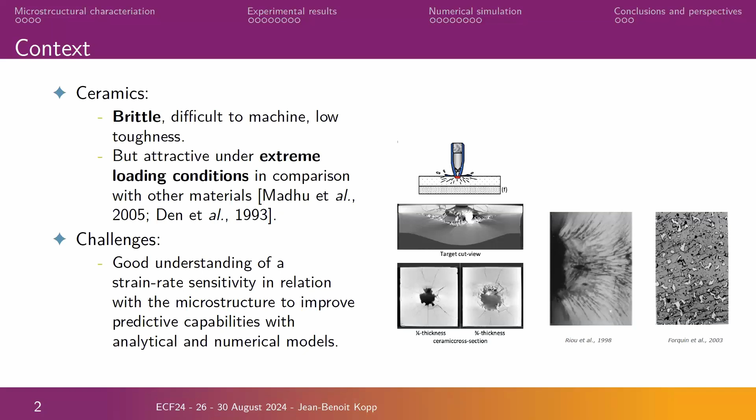Ceramics are well known to be very brittle and difficult to machine, with very low toughness, but they are quite attractive materials for specific applications, especially for defense and space, because under extreme and dynamic loading, compared to other materials, they show very good properties, even with this kind of fragmentation mechanism. So the challenge for this material is still to understand the strain rate sensitivity in relation with the microstructure, to improve predictive capabilities with different models.

We explain this increase because of the link between heterogeneities, the microstructure, and the dynamic effects of damage under dynamic loading. But finally, it's quite complicated, especially for brittle ceramics, to try to describe experimentally the evolution of the microstructure under dynamic regime.

So that is probably a crazy challenge, but we work on that, trying to describe the evolution of the microstructure at very small spatial and temporal scales during dynamic loading, to try to explain and corroborate the numerical model proposed by Cohen in 2014, or more recently in the lab by Vincent Lochon.

So the methodology is, first of all, to try to control the microstructure of porous alumina. We will talk about that just after, with the manufacturing process of the material. We use a specific specimen geometry, which is a modified Brazilian test. I will talk about that later, because we know this kind of specimen geometry well in the lab.

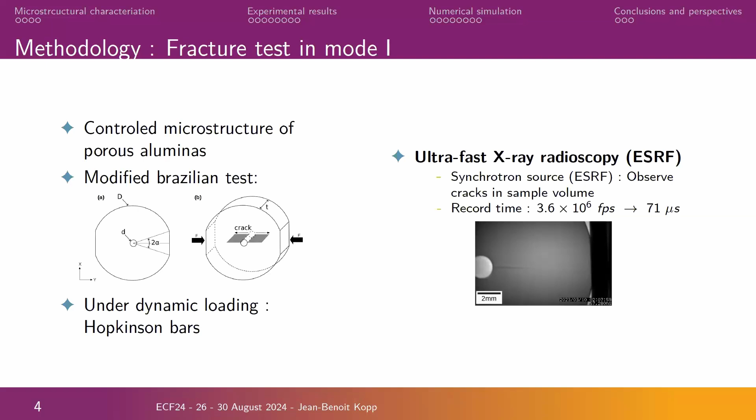This geometry makes it possible to apply dynamic loading with a split Hopkinson bar. And finally, we were lucky to use ultra-fast X-ray radioscopy at the ESRF, and it was possible to follow the fragmentation with information about the microstructure, even though it's only radioscopy in dynamic regime, because tomography is not possible with this kind of fracture time, but radioscopy was possible.

About the microstructure and manufacturing process, we use a gel casting process with an industrial collaborator, which made it possible to manufacture very complex geometries. First of all, we have a preparation with ceramic powder and polymers to achieve a specific microstructure.

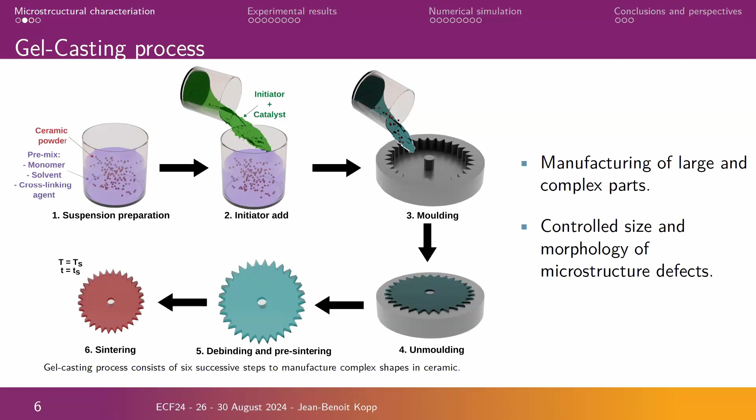In our case, we wanted to control the size and morphology of the microstructural defects, which in our case was porosity. So after molding and sintering, it was possible to have dense ceramics with a specific mechanical behavior.

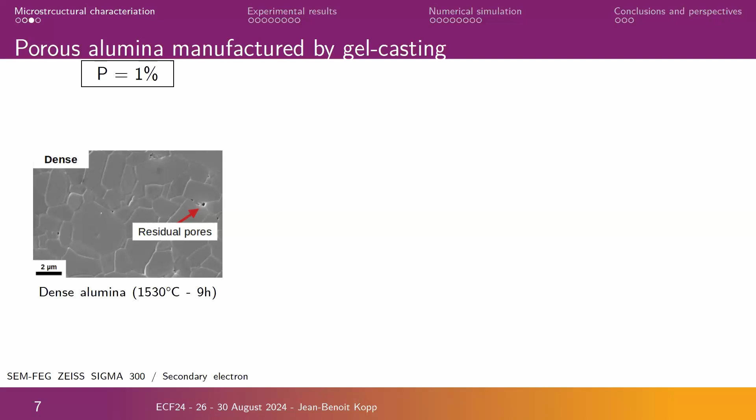So the choices we made about the material: first of all, we focused on dense alumina because it's a cheaper ceramic, and we have a lot of information in the literature for this kind of material. So we have a dense alumina with a very low porosity rate.

We have two other aluminas: porous alumina with a 20% porosity rate. The difference is the type of pore and the geometry.

First of all, we have a microporous alumina, which is obtained by sub-sintering the mixture.

And the other possibility is to have a mesoporous alumina. This was very interesting because we have spherical pores, which are obtained by using polymer preforms and sintering at the right temperature.

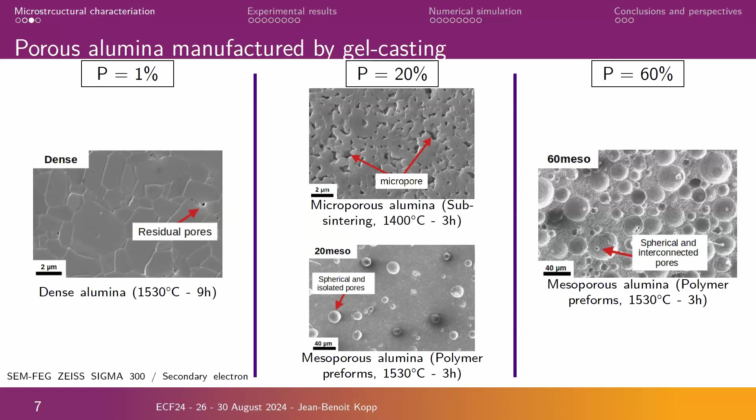And the last porous alumina we worked on is the 60% porous alumina, which behaves more like a foam.

So we have, of course, studied the microstructure in 3D with X-ray microtomography. We have a good evaluation of the microstructure with statistical evaluation. For example, with 20 meso and 60 meso, we have small pores with very spherical geometry.

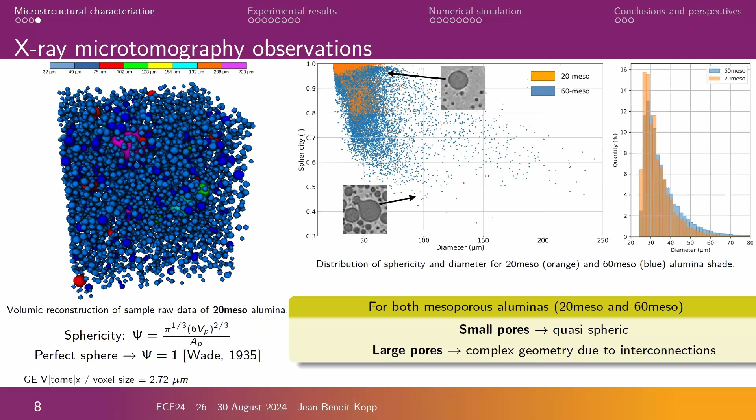Sometimes we have interconnections due to the polymer preform in the mixture, which is why we have some large pores in the microstructure due to this interconnection.

So what about the mechanical behavior in dynamics? As I said before, we use a specific modified Brazilian test geometry with specific platens, because it's well known for brittle materials that we can have stress concentration at a specific point during mechanical loading.

By using this kind of platen, it's well known that we can concentrate the maximum stress near the center of the specimen. But as we worked on porous alumina, by introducing a hole, a specific notch, an artificial defect larger than the porous defects, it was possible to ensure the crack initiates at the center of the specimen.

So finally, it is possible to estimate and calculate the tensile strength by considering a geometrical factor specific to this Brazilian test geometry.

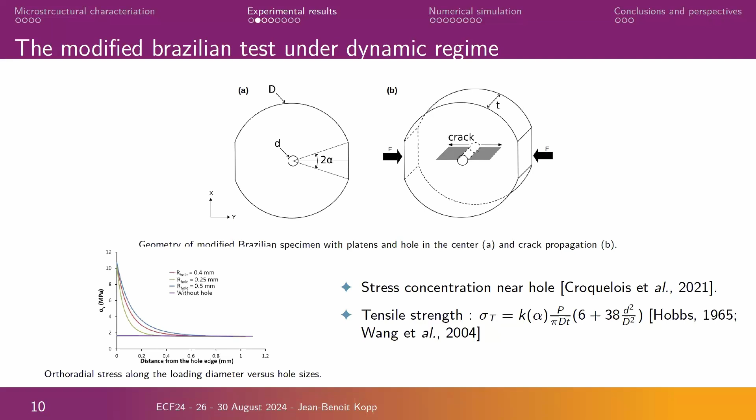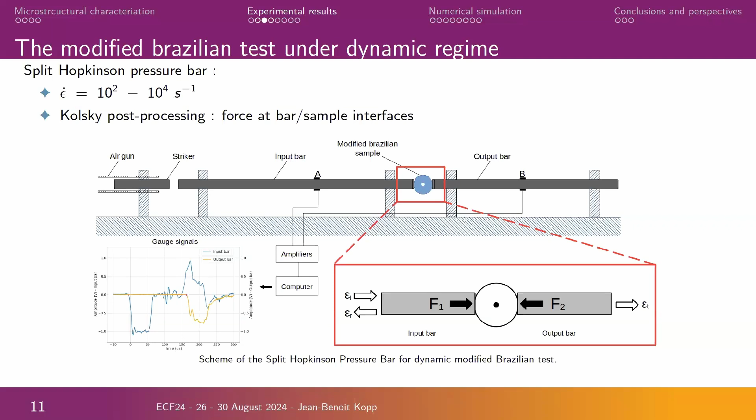As I said before, this kind of geometry is easy to apply with a split Hopkinson bar in dynamic testing. So this is what we did. It's very classical, and we use a specific Kolsky post-processing method to estimate the forces and stress applied to the sample.

The particular thing we did in this study was to perform this experiment at ID19 at the ESRF, so it was possible to follow the fragmentation of the specimen with specific radioscopy. We have the X-ray signal, and we use 2 high-speed cameras to follow the fragmentation of the cracks at approximately 4 million frames per second.

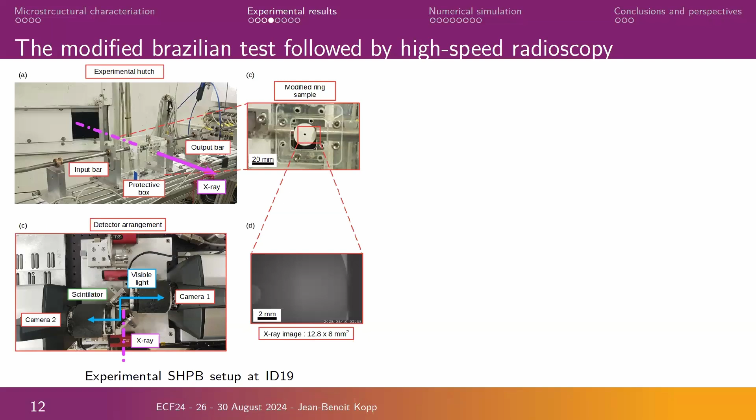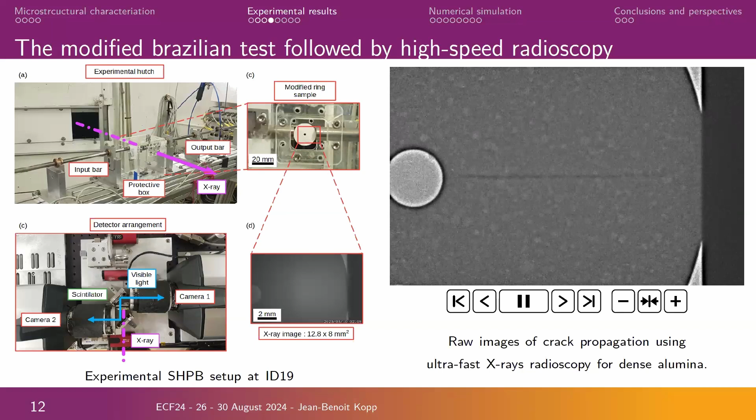So of course it is possible to estimate the force applied just before failure, but we have to be sure that we have equilibrium between the forces in the different bars. So we checked that.

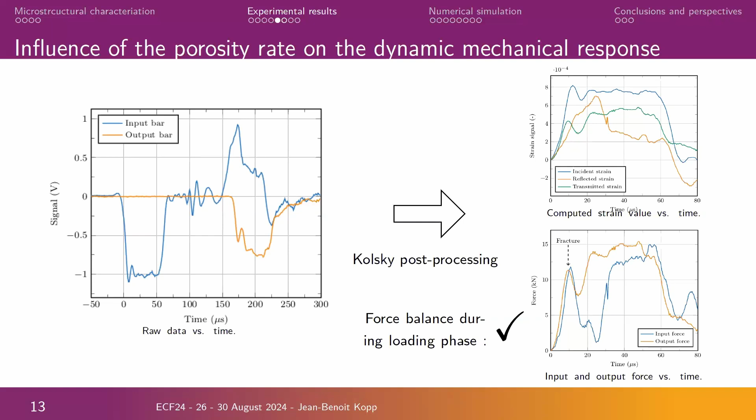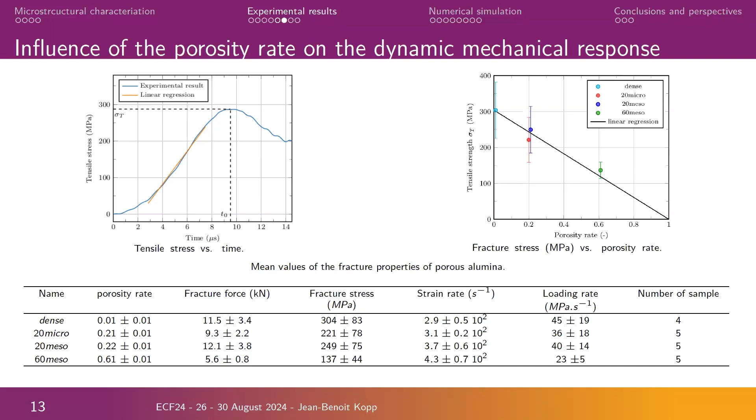Finally, we can evaluate the fracture stress as a function of the porosity rate, as expected: the bigger the porosity rate, the lower the tensile strength, as we can check just over there.

With this test, as we have isolated just a main crack in the dynamic regime, it is possible to use dynamic fracture approach to estimate the dynamic fracture energy. So we isolated one crack, which was followed to estimate the crack path history, the crack length as a function of time. During the propagation, we observe a quasi-constant crack velocity, meaning we have a stable dynamic propagation regime. With that, it is possible to rigorously estimate the dynamic fracture energy.

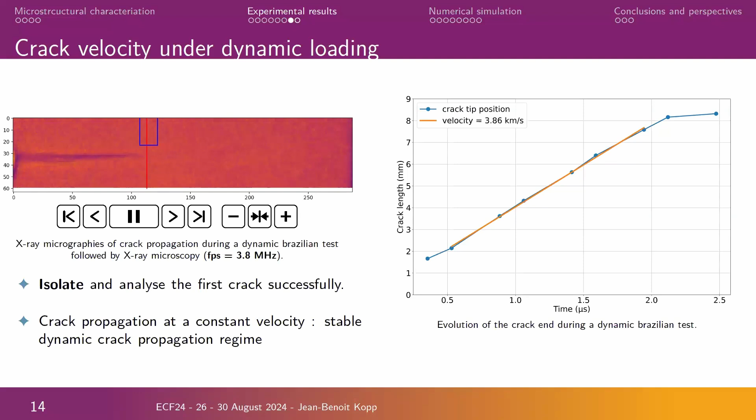The crack velocity is very high because we are working with ceramics. We estimate a crack velocity of about a few kilometers per second, depending on the density of the material - the lower the density, the lower the crack velocity. But when we estimate it as a function of the Rayleigh wave speed of the material, we observe a maximum velocity for 3 materials of about 60% of the Rayleigh wave speed, known to be the maximum velocity before macro branching, as Elisabeth Yoffe said in 1951. For the more porous alumina, we have a lower velocity, due to the microstructure of the material - the higher the porosity, the lower the velocity.

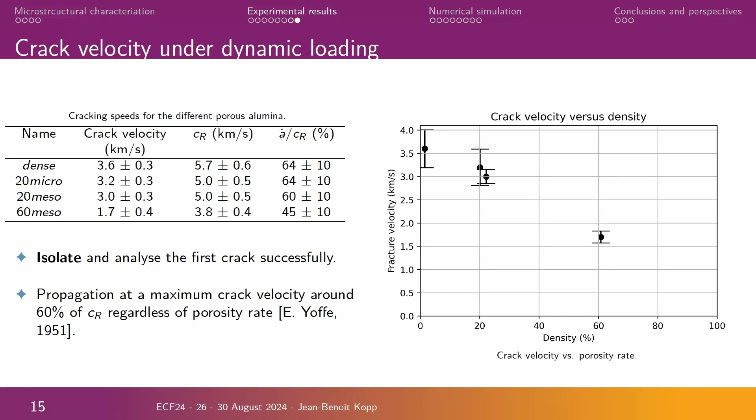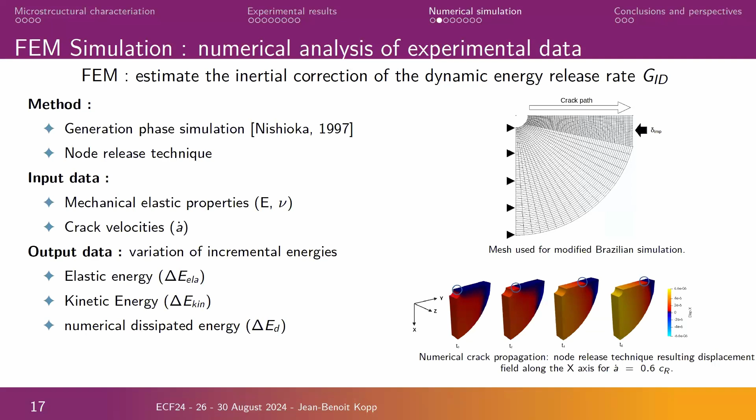That's interesting because we have a mode 1 test at the maximum velocity, so we can measure and estimate the fracture energy. To do that, we use a classical simulation with finite element method - this methodology is well known. We use a generation phase simulation, so the input of the model is the crack path history and the crack velocity. By doing that, it is possible to make a global energy balance to estimate the fracture energy and the energy consumed by the crack during the dynamic regime.

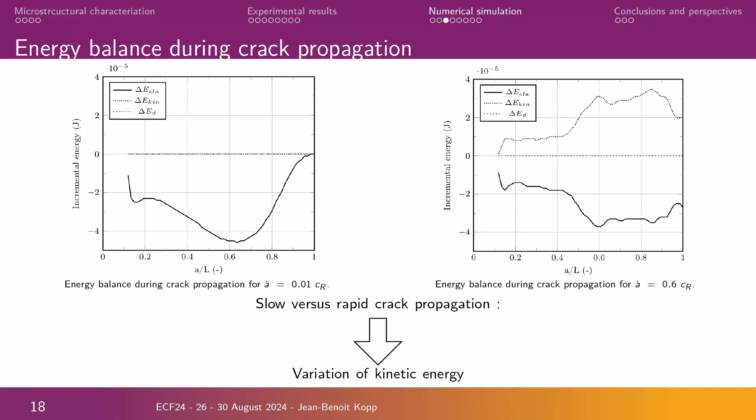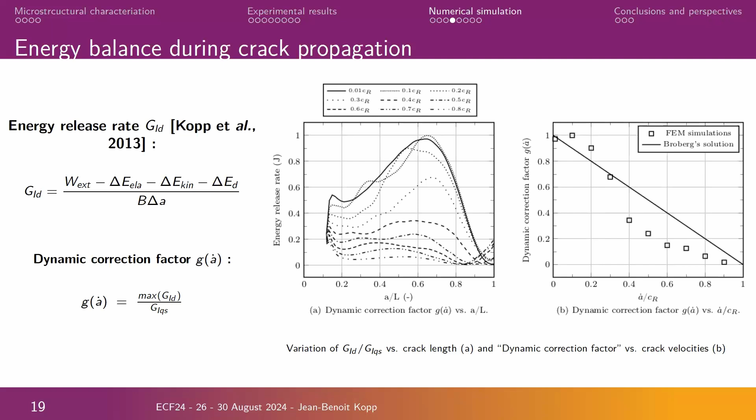The more important thing in the dynamic regime is that you have dynamic effects due to dynamic crack propagation - inertial effects, and therefore kinetic energy created during crack propagation. You have to consider this kinetic energy, which is not equal to zero at this kind of velocity. By doing that, it is possible to estimate the fracture energy by making a global energy balance with the different energy parts, considering a dynamic correction factor.

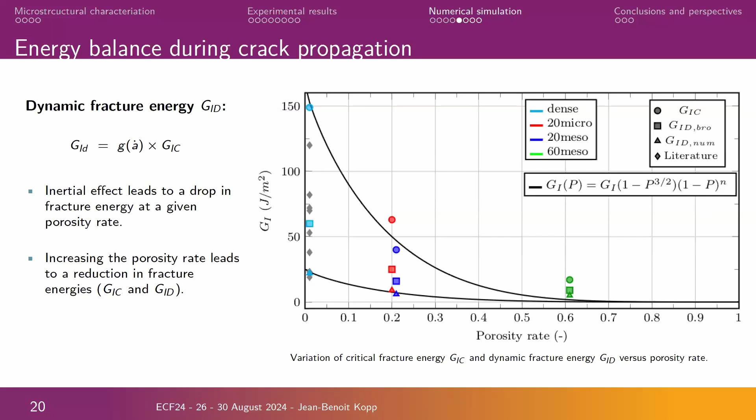By doing that, it is possible to estimate the fracture energy as a function of the porosity rate. We have values obtained by numerical simulation considering experimental data. As you can observe, we have a decrease of the fracture energy as a function of the porosity rate. But of course, the value depends strongly on how you estimate the fracture energy and how you consider the dynamic effects. With our approach, we found some very low fracture energy values.

Another last thing in this presentation is about microstructure and fracture analysis, because post-mortem, is it possible to recover all pieces of the specimen? Because we have everything in the small box during the propagation, it is possible to reconstruct the specimen and try to find the main crack and follow the fracture mechanism locally.

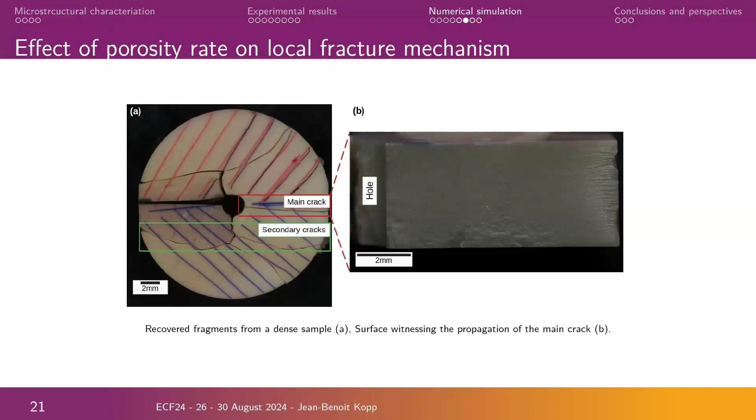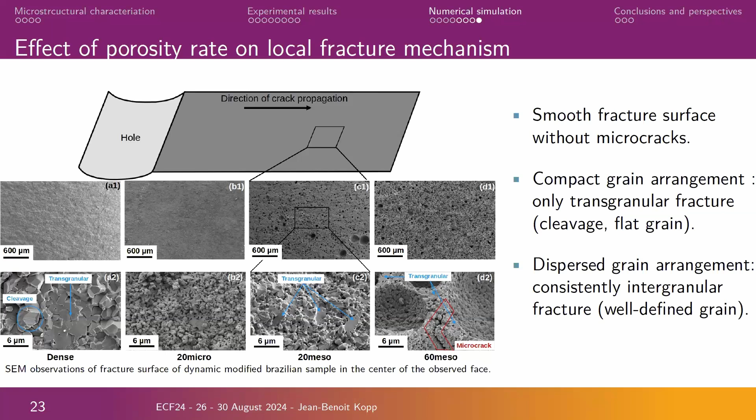So we made different observations with electronic microscope, just near the hole at the crack initiation, and we observe some specific mechanisms there with microcracks near the hole, and of course classical transgranular and intergranular fracture. We also observed the fracture surface near the middle of the specimen, in the smooth part of the fracture surface in the dynamic regime, which is quasi-permanent. In this quasi-permanent regime, we do not observe any microcracks in the volume, only smooth fracture surface with the same local mechanism at the grain scale, transgranular and intergranular.

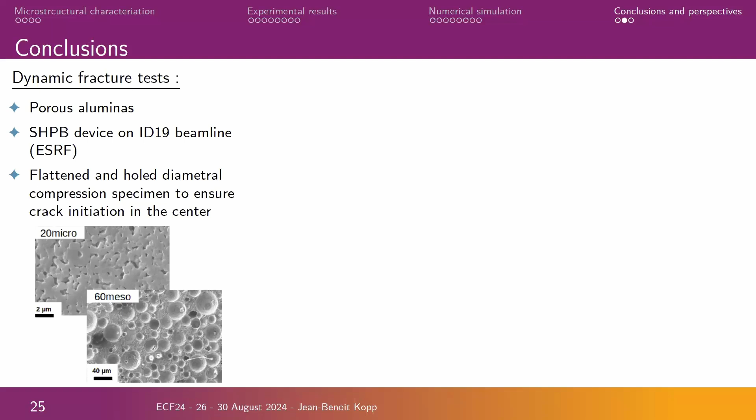To conclude this presentation: first, we made dynamic fracture tests using a very special instrument at the ESRF on the ID19 beamline. It was possible to study the influence of the porosity rate on the fracture properties. We were able to follow a dynamic propagation at a few kilometers per second.

It's quite interesting using this specific device and considering the radioscopy - it was possible to see if we have only one initiation of the crack or a lot of crack propagation at different places in the specimen. Finally, we followed a stable dynamic propagation regime, and it was possible using numerical simulation to estimate the fracture energy in a dynamic regime by taking into account inertia effects.